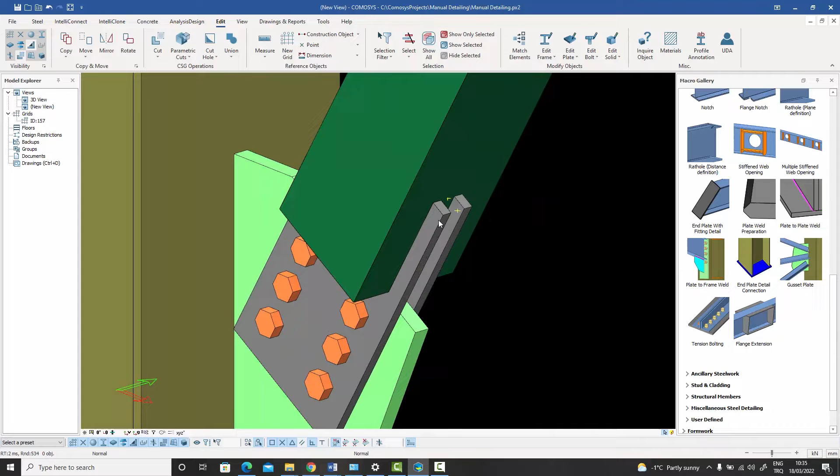There's a gusset plate welded to the column, and there are two plates which are welded to the incoming vertical brace, and they are connected. So the vertical brace is now connected to the column through these bolts. And we'll try to make this connection without using any macro. So let's start from scratch.

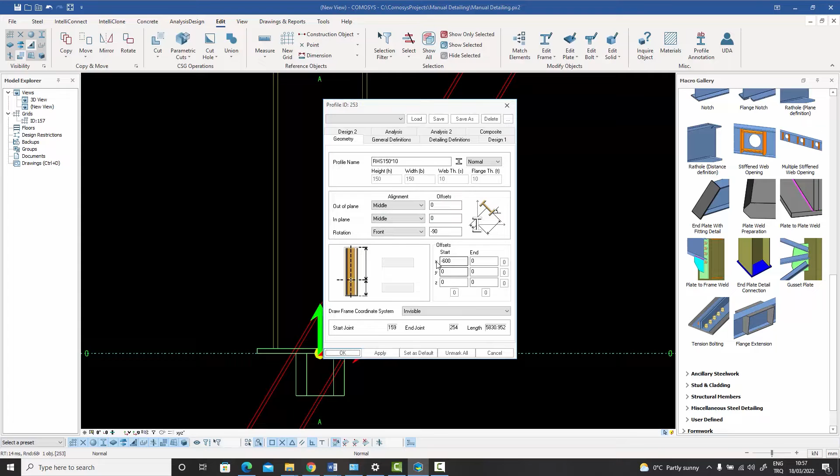And here we are looking at the column and the brace from the side. I've created a view which is looking at these two elements from the side. And a good idea is to begin by just double clicking on the brace and pulling it back just a random number so that it reduces the clutter. Or maybe I need to put in minus 600 for that. Yeah, something like this.

Now I can begin constructing my model in my mind, right? This won't be the final position of the brace. I need to note that, but it'll be somewhere over here or over here. We don't need to worry too much about that. So I know that my two plates will be coming out like this, and there'll be a line along. So they'll be, say, 10 millimeters on the side, and they'll be coming down like that. And those two plates will be approaching the column, and they won't be hitting the column. They'll be stopping short of the column somewhere over here, say on a vertical line 20 millimeters away from the column. So let's construct that line.

So we can go to my construction line object, and I can construct that line by hovering over this point and pressing enter and saying dx20, right? So I've snapped to this point, and now I can just press Control and snap to any point over here and press enter, and then say dx20 again, and I've created this vertical construction line, which is 20 millimeters away from the face of the column.

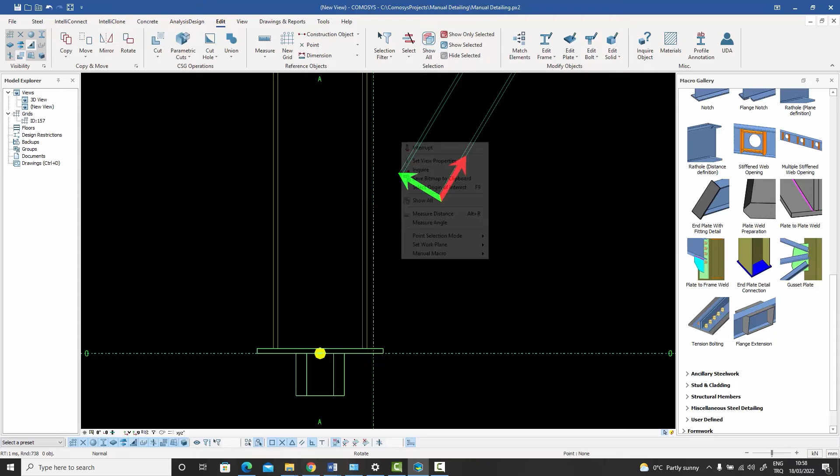Now I need another line which is inclined, which is like 10 millimeters away from the top face and the bottom face, and those will represent the lines of the two plates which will be coming in. So I need to create these two inclined lines over here, and the best way to do that is to first of all set my work plane by 3 points along this member over here. So now I know that this is the X direction and this is the Y direction.

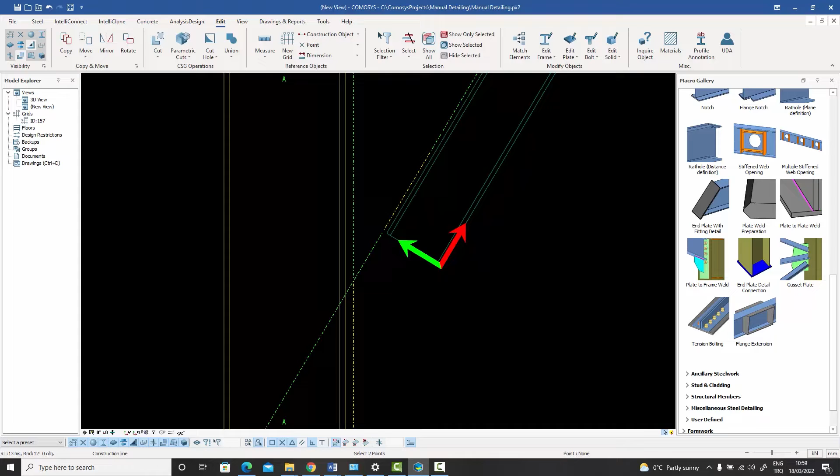And I can go back to my construction line object and hover over this point and say dy 10 millimeters. So that's the point I want. And then I can just press Control and hover over any point on that line and press enter and press dy. And now I know that this line is 10 millimeters parallel to the top of the brace. And I need a similar line over here.

So let's go to the bottom over here, press enter, and this time say dy minus 20. Or maybe I need to say minus 10, I think. Yeah, so I just hover over this point and say dy minus 10. And then press Control, hover over this point, press enter, and dy minus 10 again. So my lines are ready.

And what do these lines tell me? That my two plates will be along these lines, and the plate has to end over here because it needs to not hit the column, right? So I've established where the corner point of my plate will be. So now that I have my corner point over here, let me construct the opposite point on this side, right? There will be a point over here where the plate will turn.

And for that, the most appropriate command is my projected point command. And I can just press Control over this line and snap to any 2 points, and then select this point to give a 90-degree projection onto that. So now I know that this is the point where my two plates will end. This is the point close to the column, and this is the other side. Now from here, I want an edge distance of 60, then 3 rows of bolts with 60 millimeters between them. So there's 60, 60, 60, then another 60 till the end of the gusset plate.

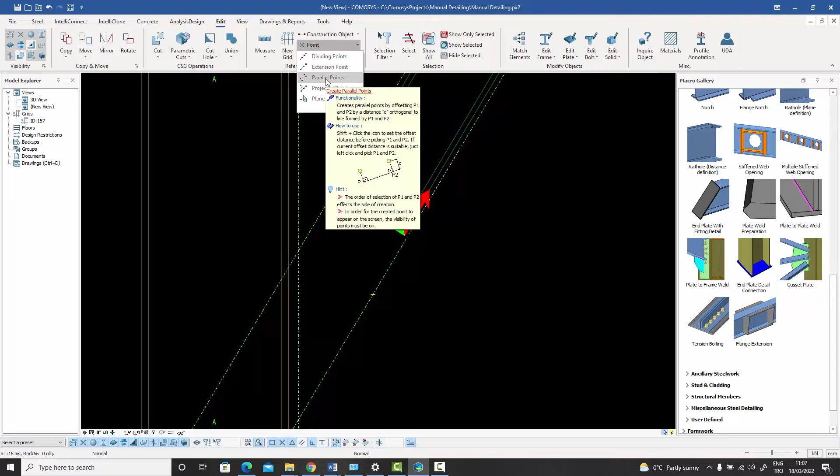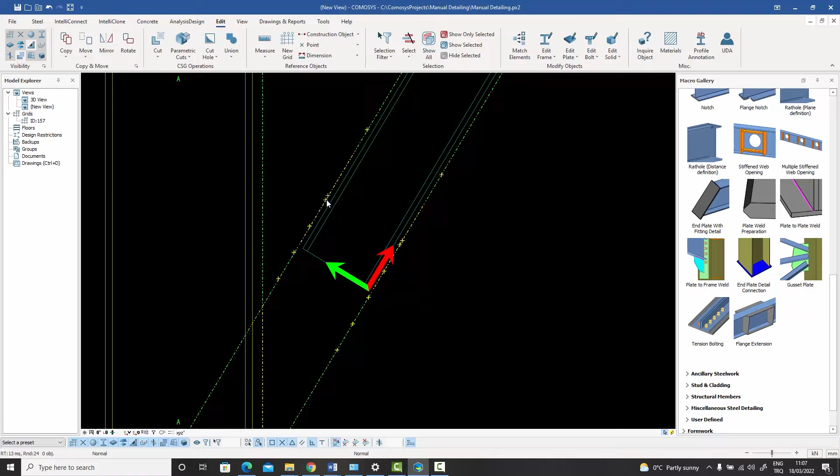So what do I do with that? I just use my parallel points command and I press Shift. And I say 4 into 60, a gap of 10, and then another 150 for the welded portion of the two plates, right? And all I need to do is just select these 2 points, and my points are ready. If you notice on the screen, these were the first 2 points. This is the first 60, the second 60, the third 60, the fourth 60. This is the gap of 10 millimeters, and this is the end of the plate.

So my gusset plate will basically be turning from here towards the column, right? And it'll be coming like that, and then it'll be coming down to the bottom, hitting the base plate, turning left, and then going back up. So all I need right now is basically to create my gusset plate points.

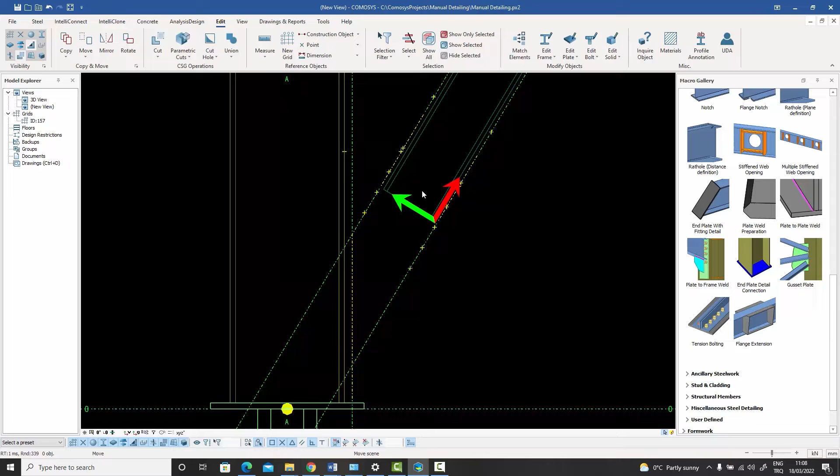Let's do that. I can project this point perpendicularly to this vertical line, and we can do that by the projected point command again by pressing Control on the side of the column, and then I can just select this point, and I know that this point is now the corner of the gusset plate. So it comes from there to the bottom of the base plate over here, goes like that, and comes back up. And actually I've got all the points ready, so I might as well enter my gusset plate right now.

So I can start from here, I can go to that point, to that point, I can come here, I can go in, and then I can finish it off. So now that I have my gusset plate ready, I can now fit this vertical brace to this point, this 10 millimeter line over here.

So I can go to my edit menu and go to my fitting with 2 points command. I can select the bracing. Then it asks me to select the nearest point to the fitting. I want this point to be fitted. And then it asks me for 2 points. And when I do that, my bracing is fitted back to that point. I can right click to finish the command.

So now that I'm done with fitting my incoming brace, I can continue with creating these 2 plates which will be coming out of the brace into the gusset plate. And I can go to my steel menu, go to my plate command, and start entering the plates. As you can see, the plate has appeared.

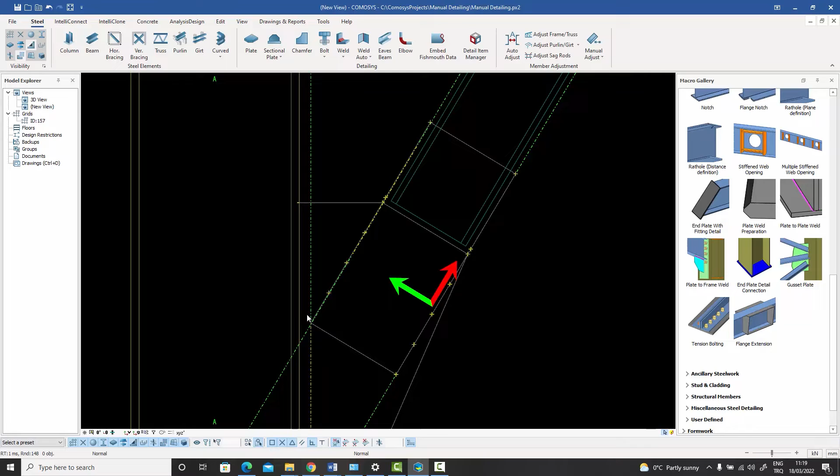One thing we need to note is that since we are working in this sectional view over here, everything is being created exactly at the middle of that plane, right? So right now, this plate and this plate are both clashing with each other. And we can see that. We can just rotate this around a bit, and we can change the draw mode, for example. And we can see that the 2 plates are actually hitting each other.

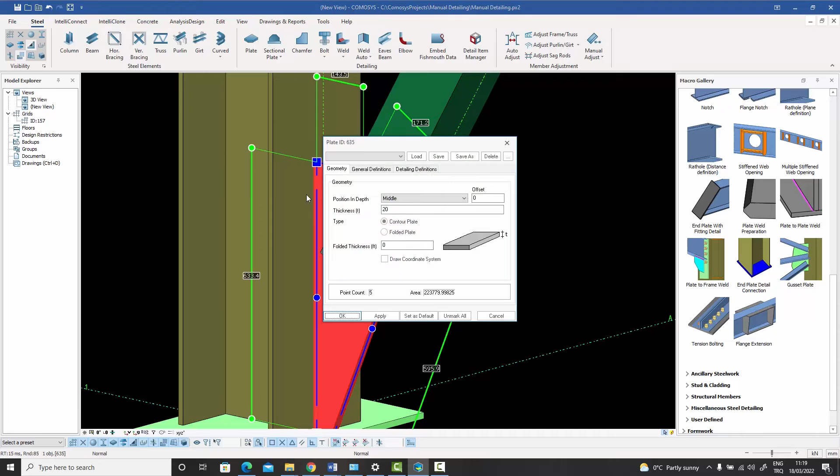So I can also modify the thicknesses. For example, I can double click on this one and I can change the thickness to 15 millimeters. And then as far as this plate is concerned, I can change the thickness to 12 millimeters. But also I need to change its orientation.

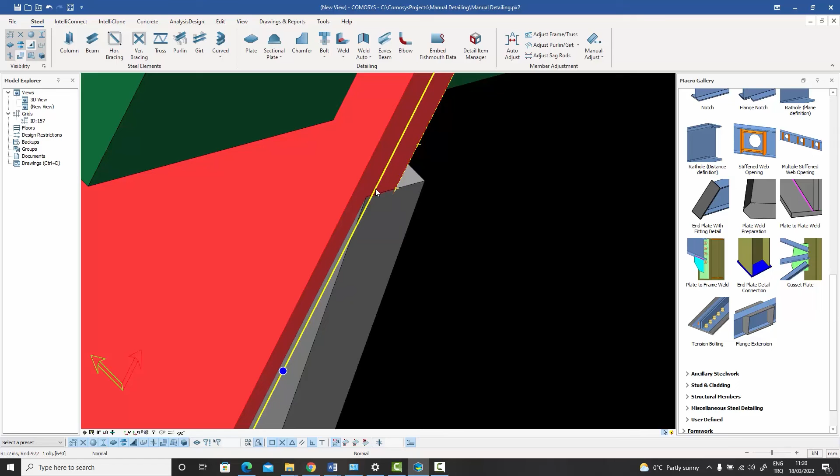So the anchoring point. So I press Control W. So it comes to this point. And then since this one was 15 millimeters, I need another 7.5 millimeter offset. So I press Enter and give it an offset of 7.5 millimeters. So now this plate is located exactly where I want it to be, right? Let's change the color of the plate if we want to. We can change it to anything else.

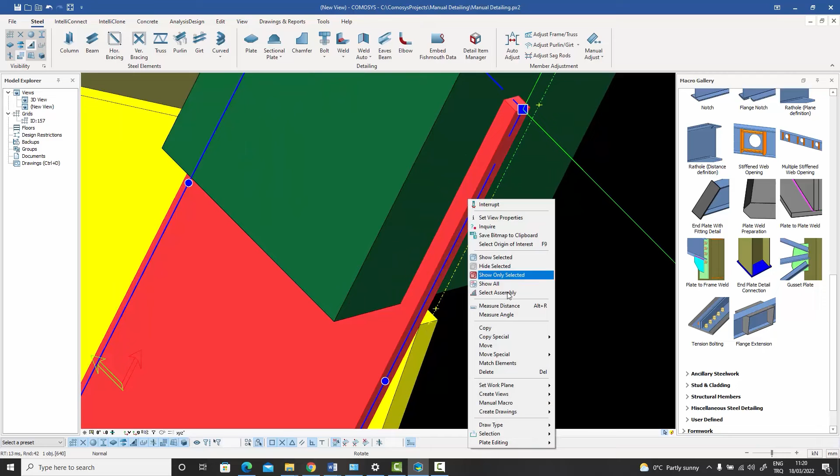And now what I can do is I can copy this plate linear. Let's copy it a distance of from here to here, right? And we have another plate. Now the reason why it's not gone to the right point is because of the anchoring options of this plate. So I can just press Enter, or I can just press Control W, and now it's gone to the right side.

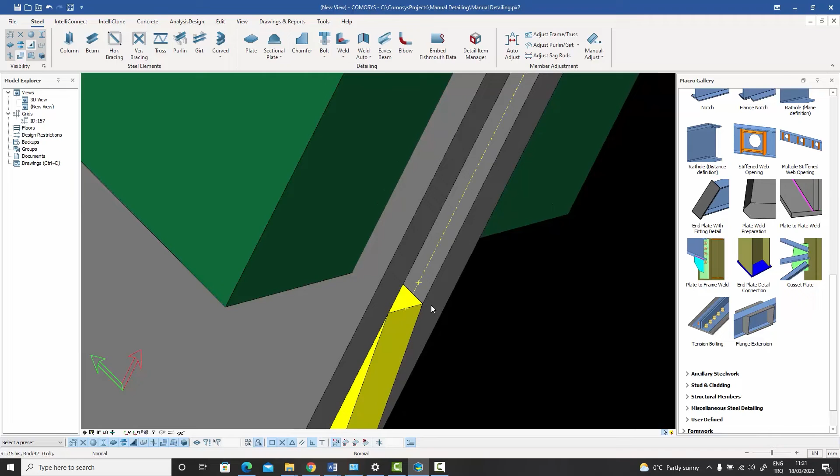But I also need to change the sign of that offset to -7.5. It's always a good idea to enter your plates like this. Now the advantage which I have is that I have used the offset of front with 7.5 and behind with -7.5 for the two plates.

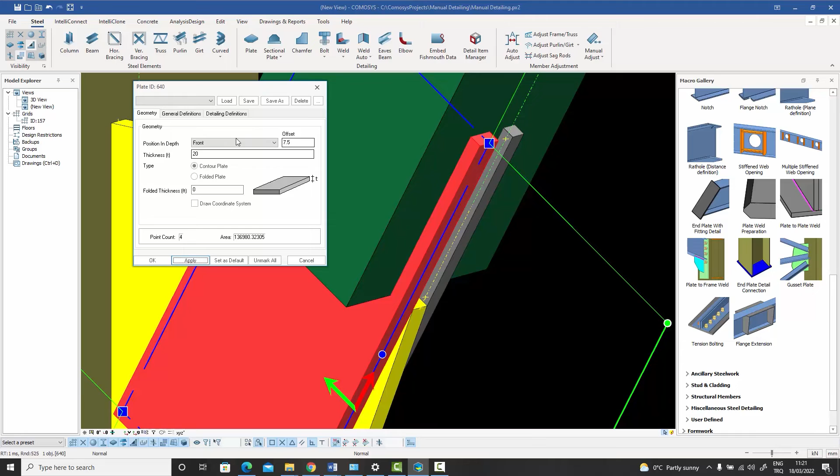The advantage which I have right now is that if for any reason I wanted to increase the thickness of the plate to some other number, say 20, my plate will not clash with the gusset plate. It will thicken in the outer direction, right? And that's important in detailing because changes in thicknesses are very possible. Similarly, the other plate, if I were to change its thickness to a higher number, it will thicken in the other direction. And this is exactly what I want.

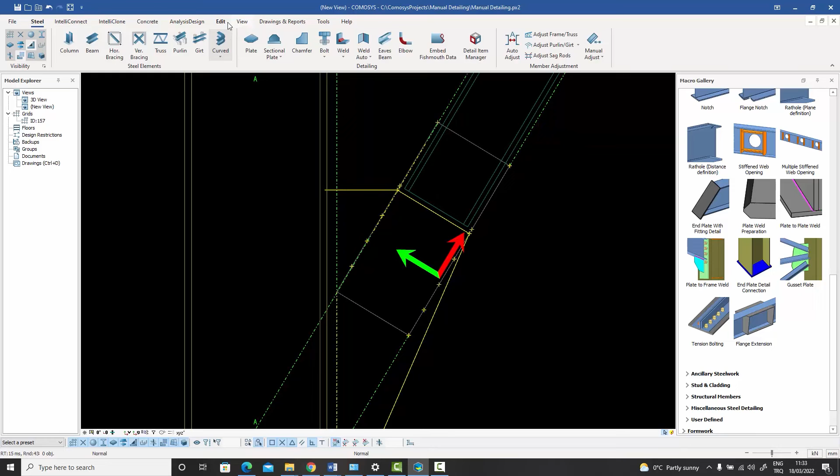So now that I have my plates exactly where I want them to be, I can proceed with creating the points I need to create the bolts. So let me create a dividing point between these two and any one of these two. And basically what I want is the origin of my bolt axis to be over here and the X direction to be this one. So I create these 2 points before I get into my bolt command.

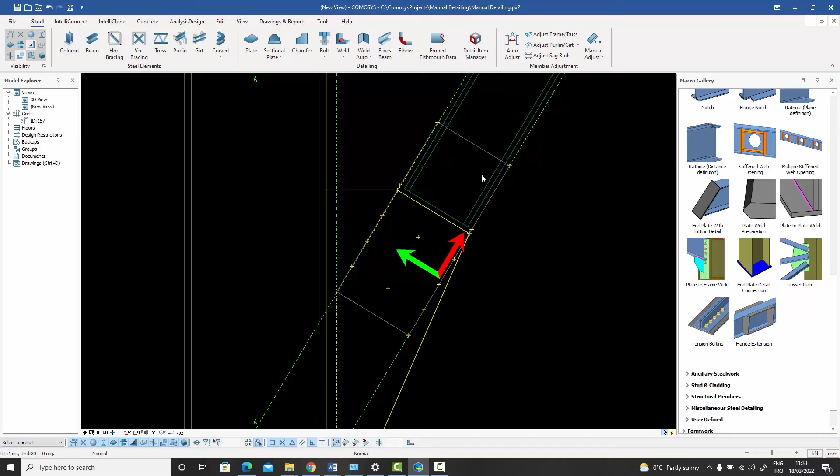Now, regarding the bolt command, it's always a good idea to prepare before you enter the command, because the moment you enter the command, it's going to start asking you for the parts which need to be bolted. I can see that my gusset plate is visible. The other plate is visible, but there are 2 plates over there, and it's going to be difficult for me to select the other plate because they're lying one on top of the other. So a good idea in such situations is to rotate the view slightly so that both become visible and selectable, and then enter the bolt command.

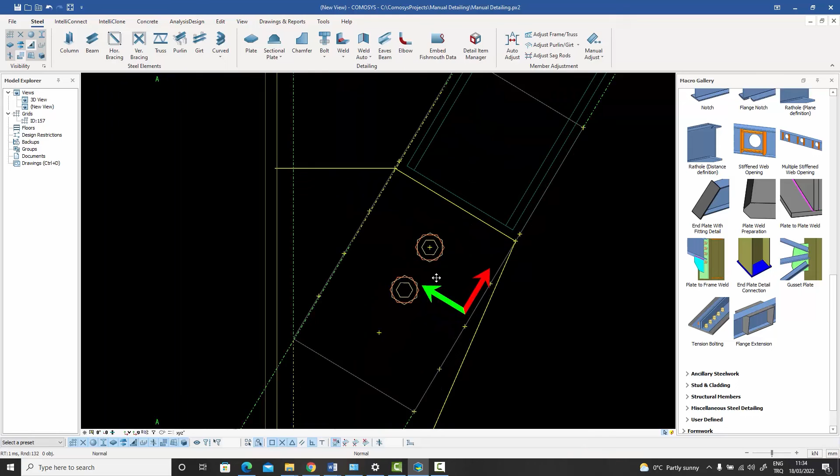And when you do that, you will see that you can easily select the first plate, the second plate, the gusset plate, right click, and then select the origin of your bolt and the X direction, and the bolts will be created. Now, obviously they've been created with whatever default settings you have, but you can easily change those by double clicking and going to the positions tab.

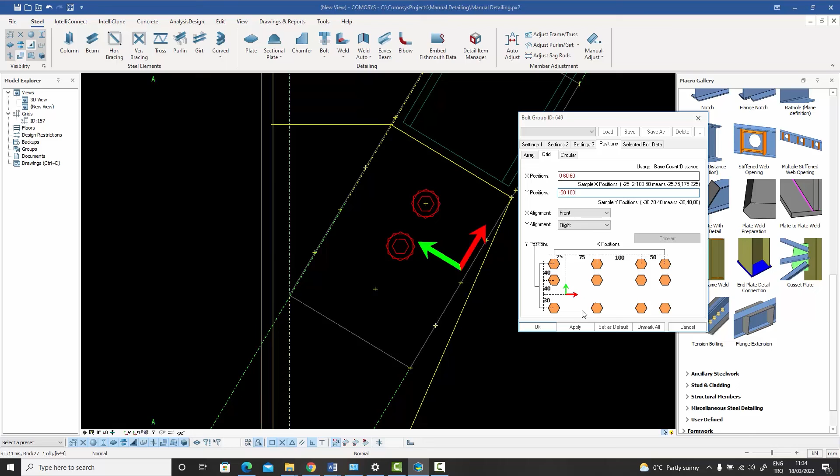I'm going to change the X coordinates to 0, 60, 60 and the Y coordinates to -50, 100. We've talked about these a lot. This -50 is an absolute coordinate. So this is the Y direction. So -50 and then another relative 100. And similarly, an absolute value of 0 followed by 60 and 60. And when I apply that, I will get the result which I want.

One small thing left for us to do: if we were to just select these members and right click and do a clash check, we will see that the 2 plates and the incoming brace are clashing, obviously because the plates are going through the incoming brace. The solution is very simple. You just rotate the view around a bit, go into your edit menu, go into your cut commands, and go to the part cut command.

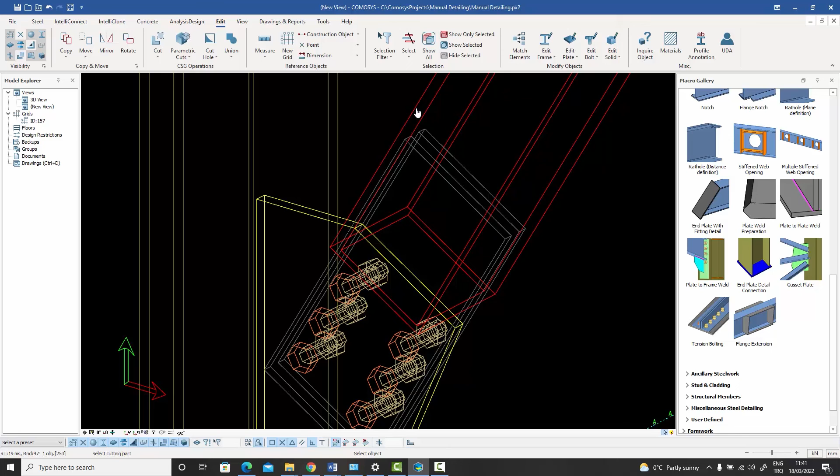When you press this command, it asks for the part to be cut. You want the incoming brace to be cut, and the cutting part will be the first plate. Then it asks, do you want to delete the cutting object? No, we want to keep the plates, so we say no. Then the command continues, and once again we want to cut the same incoming brace, and this time the cutting part is the other plate, and it asks the same question. We say no again, and we're done.

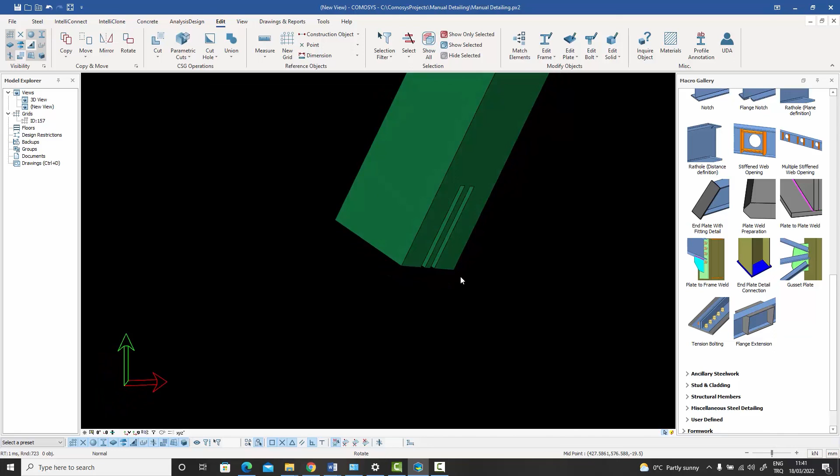And we can see the results like this. If we were to just select the incoming brace and say show only, we can see that it has been cut at the points where the plates were hitting it, right? And now I can just say show all, and this is it. My connection has been finalized. So now it's time to look at the results.

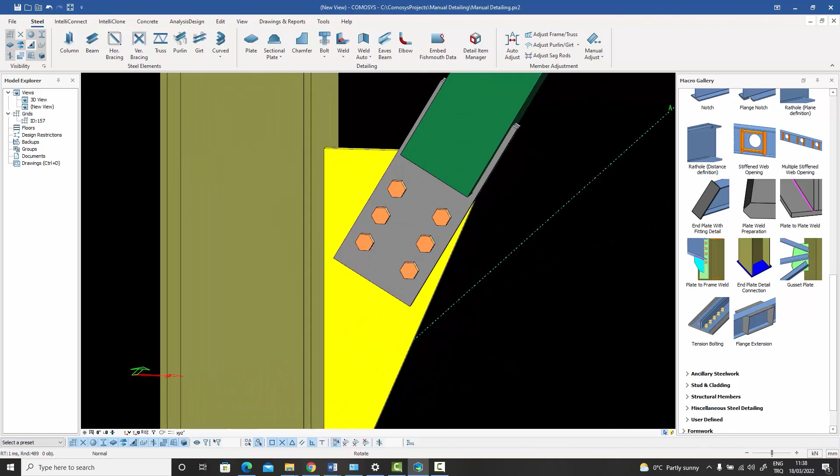As you can see on the screen, this is exactly what we aimed for in the beginning. And we've created this connection without using any macro. We took some time, maybe 10, 15 minutes, but the only reason for that was that I was explaining everything as we went along. Once you are familiar with manual detailing and your hands are quick at finding the necessary commands, you will realize that it's extremely easy to create all these complicated connections in COMOSYS. All you need to do is be familiar with where the commands are and then be able to use them.